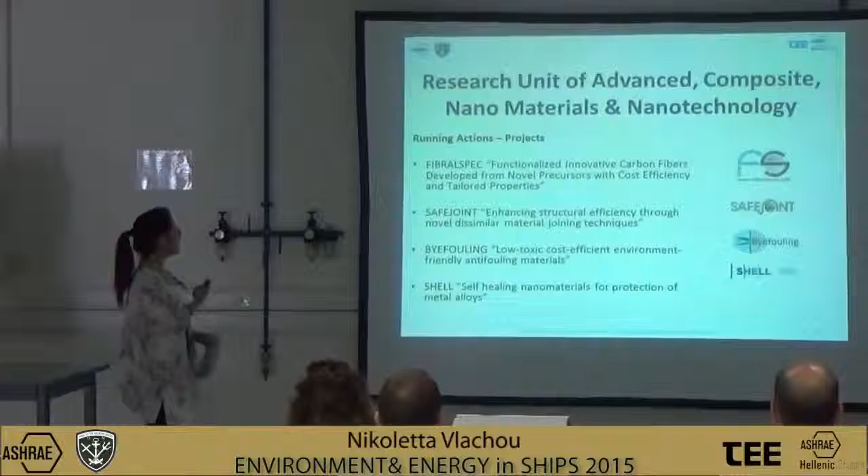These are some of our achievements. We have over 70 papers in international journals since 2006, and we have participated in various projects, national and international.

Now, my presentation will have this structure. First of all, I will refer to the maritime industry and why it's so important. Then we move on to the coating systems for ship painting, and we'll discuss the environmental impact that they currently have. Then I'll try to introduce you to life cycle assessment methodology, and we will see a small case study, and we'll have the opportunity to discuss the results that came of this study and every other question that may occur.

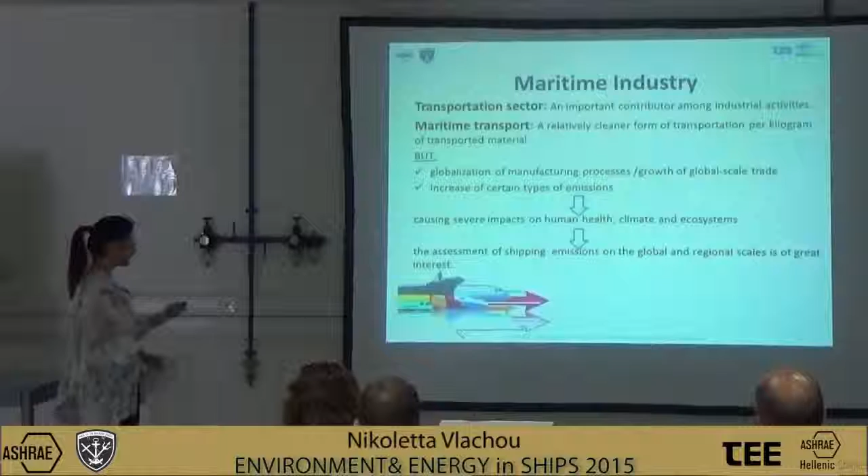First of all, as it is easily understood, the transportation sector is an important contributor among industrial activities, especially maritime transport, which versus air and road transport is a relatively cleaner form of transportation per kilogram of transported material. However, due to the globalization of manufacturing processes and the growth of global scale trade, there is an increase of certain types of emissions that may cause severe impacts on human health, climate, and also ecosystems. So, the assessment of shipping emissions on the global and regional scale is of great interest.

Those emissions that I mentioned can be classified into three categories. Those that are related to fuel consumption, and they are released during the operation of the ship. Secondly, the anti-fouling coatings, that many times have water-soluble compounds that are also released to the seawater. And last but not least, due to the maintenance and the waste that is produced during the maintenance of a ship.

An integral part of all the organic solvents and diluents are the volatile organic compounds, or else VOCs, that are used in the paint formulations or during the application of the paints in shipbuilding, and the reduction and the elimination of those and other toxic or carcinogenic components from traditional paint products has been attempted for many years.

A very good example of this, of a toxic component, is tributyltin, or else TBT. That was the favorite biocide for use in anti-fouling paints until the late 80s, when a Europe-wide ban on TBT use on boats under 25 meters came in. This was due to the observation that TBT was causing severe damage to shellfish communities, and not only.

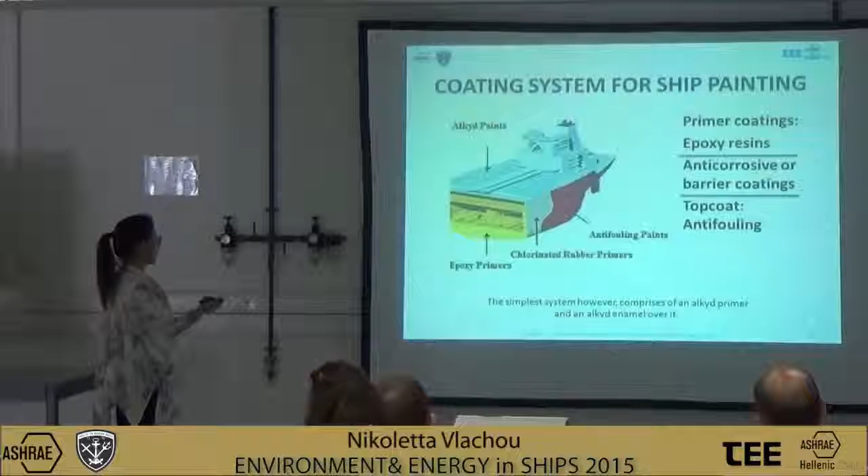And the last layer, the top coat, the anti-fouling one, has a dual function. First of all, the anti-fouling protection, as it is easily understood. And the second one, the decrease of drag resistance. For the external surfaces, the simplest system, however, comprises an alkyd primer for the external surface of the ship and an alkyd enamel over it.

I want also to say that LCA is a standardized method by ISO 14040, and there are two important applications of LCA. The first is the analysis of the contribution of the life cycle stages to the overall environmental load. And the second one may be the comparison between products for internal or external communications.

The concept of LCA started in the 1960s. Then the oil crisis came, and there was a need for development of LCA thinking. The interest increased in Europe till the 90s, until today, where there is a wide international spread. Now, for conducting a life cycle assessment, there are a lot of impact assessment methods. Examples of them are the ReCiPe method, the Eco Indicator 99, and the CML-IA.

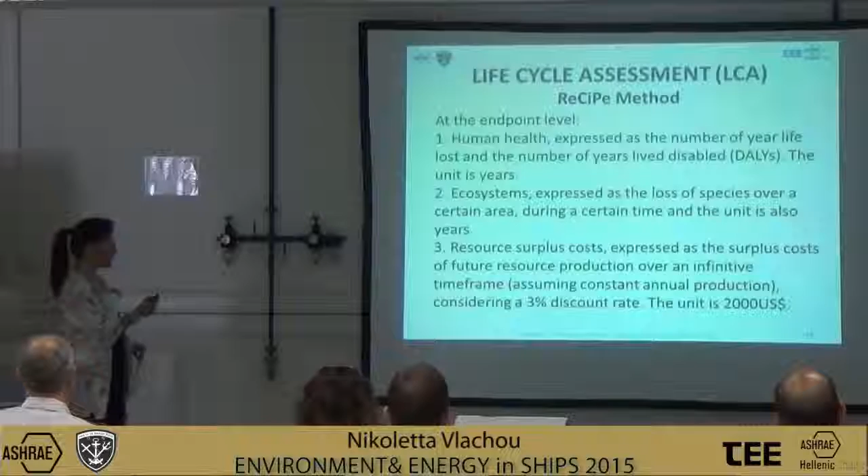It has 18 midpoint impact categories. 10 of them are related to the marine environment, and we have 3 impact categories that we're going to see right now. The first impact category at the endpoint level is human health, expressed as the number of years of life lost and the number of years lived disabled. The unit is years. The second one is ecosystems, expressed as the loss of species over a certain area during a certain time, and the unit is also years.

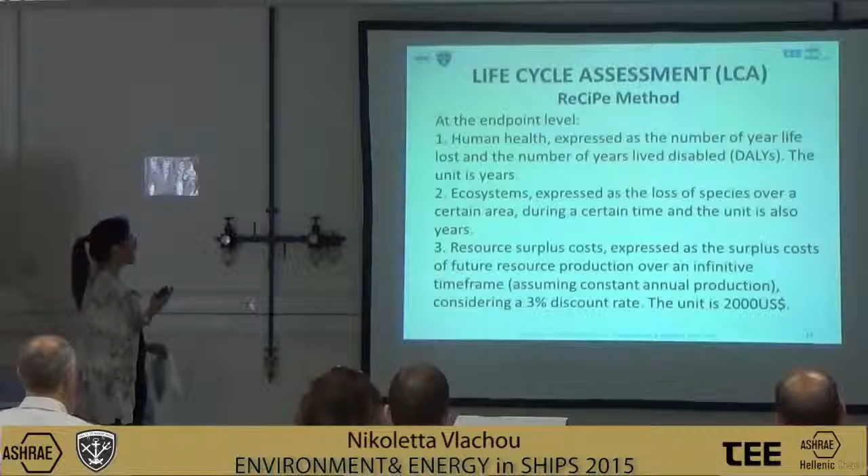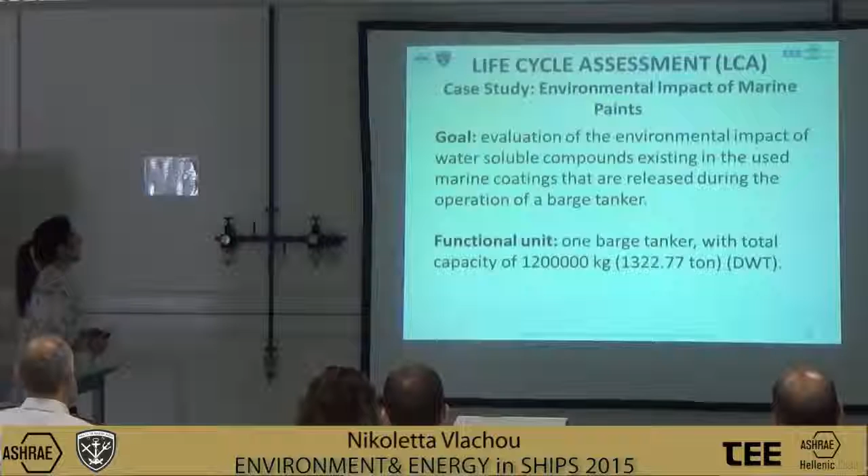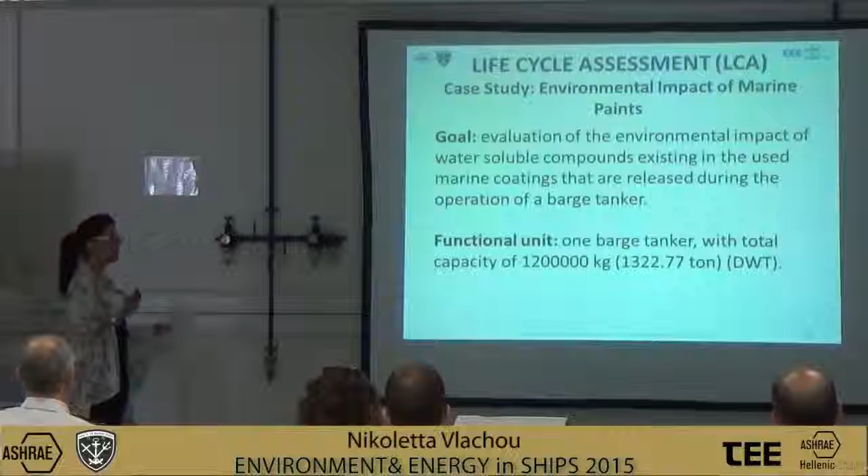Our case study referred to the environmental impact of marine paints, and especially the anti-fouling coatings. The goal was to evaluate the environmental impact of the water-soluble compounds that are released during the operation of a barge tanker. But why a barge tanker? We used this type of ship because it was already available in the database of the commercial software that we used, so it was much easier to begin with.

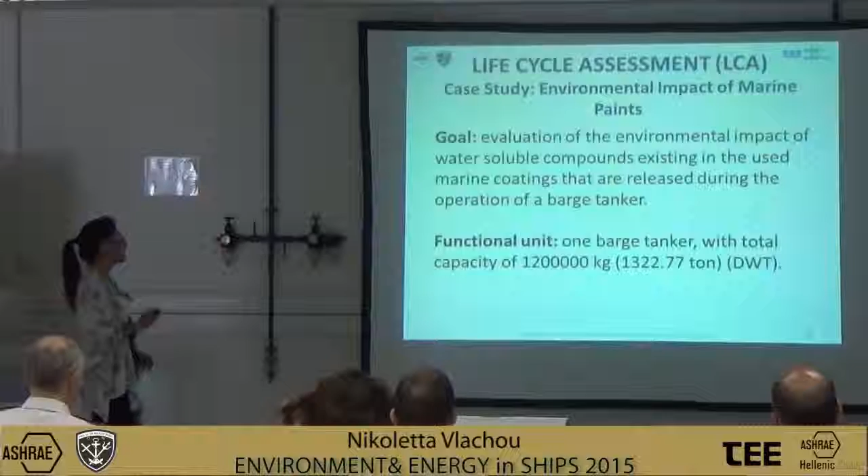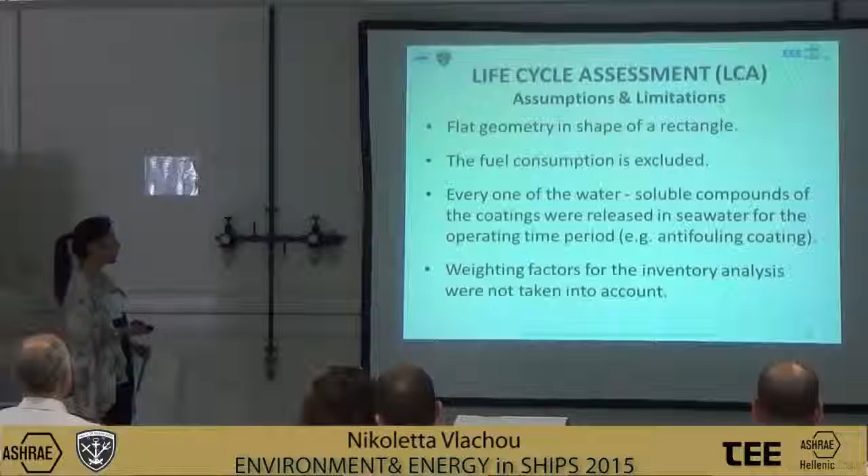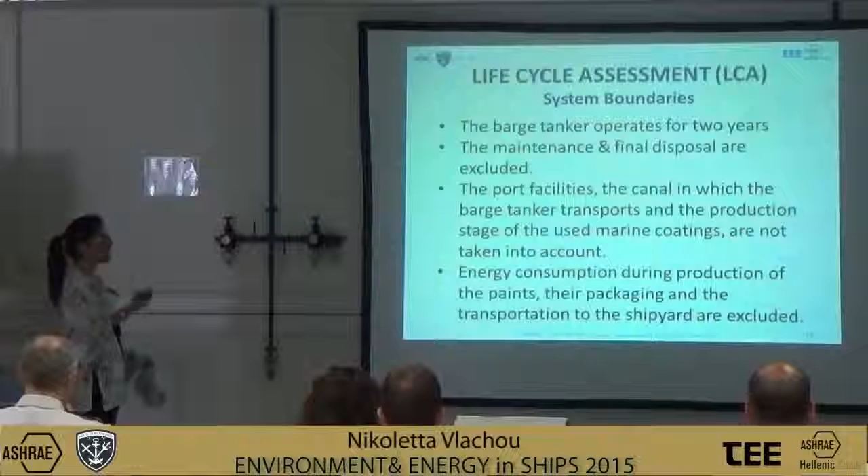The fuel consumption was excluded during our study. All of the water-soluble compounds of the coatings were released in seawater for the operating time period, and the weighting factors for the inventory analysis were not taken into account. We assume that the barge tanker operates for 2 years. That's why the maintenance and final disposal are excluded, and it was difficult to calculate the fuel consumption for such a short period.

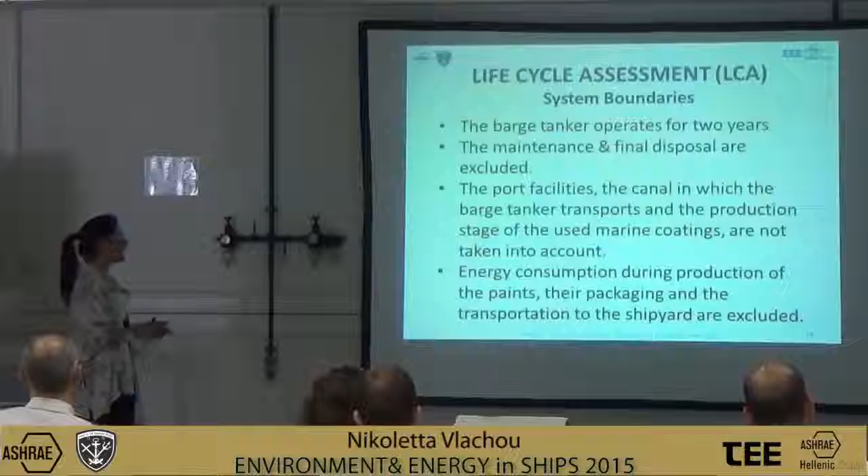The port facilities, the canal in which the barge tanker transports, and the production stage of the used marine coatings are not taken into account. And energy consumption during production of the paints, their packaging, and their transportation to the shipyard are also excluded. We only wanted to see the environmental impact of the anti-fouling and the effect that the released compounds may have on the marine organisms.

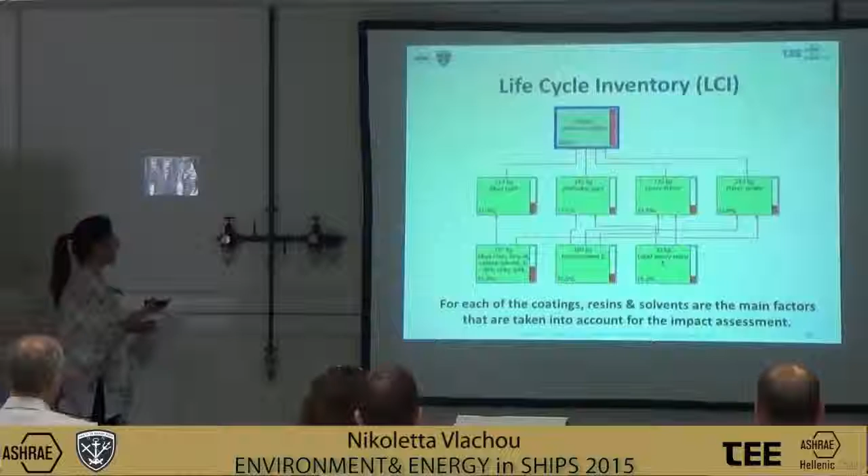Okay, by entering now our data to the commercial software that we use, this tree diagram was automatically made, which depicts the interaction between the different materials used and their contribution to our final product. As it can be seen, for each of the coatings, resins and solvents are the main factors that are taken into account for the impact assessment, as the other compounds are added in very small quantities. So practically, we assume that they do not have such effects.

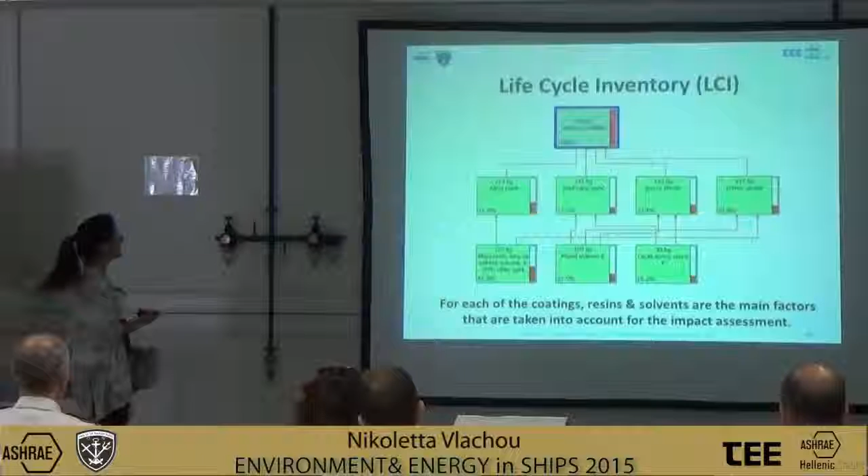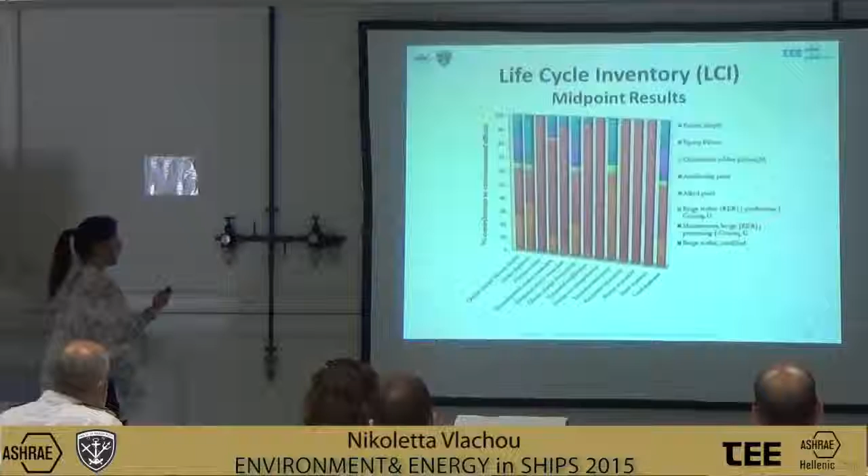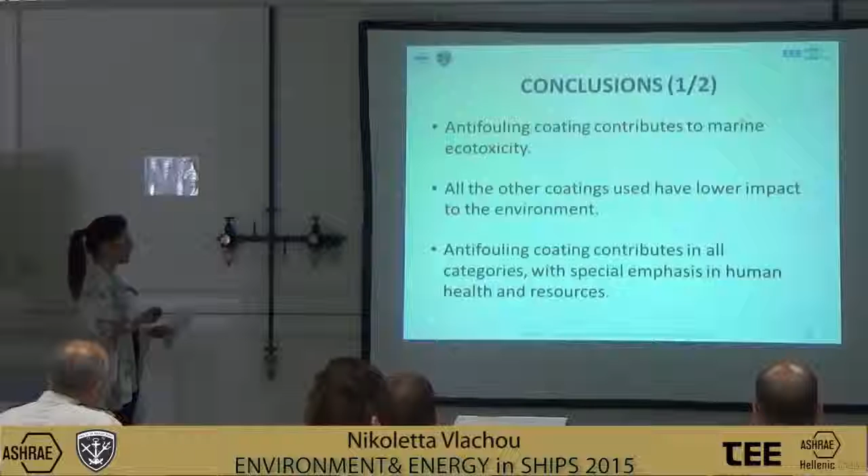The anti-fouling coating contributes to marine ecotoxicity. All the other coatings have lower impact, as I already mentioned. And anti-fouling contributes not only to the marine environment, but also has a negative effect on human health and on resources too. The alkyd coatings also exhibit higher impact on ecosystems due to the resins used in their production, and the impact of the other two primers, the epoxy and chlorinated rubber, is lower as they do not contact seawater directly.

Some future recommendations are the need for replacing the toxic compounds that are included in marine paints, and also the need for development of innovative coating systems with anti-fouling activity but with fewer bioaccumulative effects in higher organisms. These innovative coating systems may possibly alter the fuel consumption also.

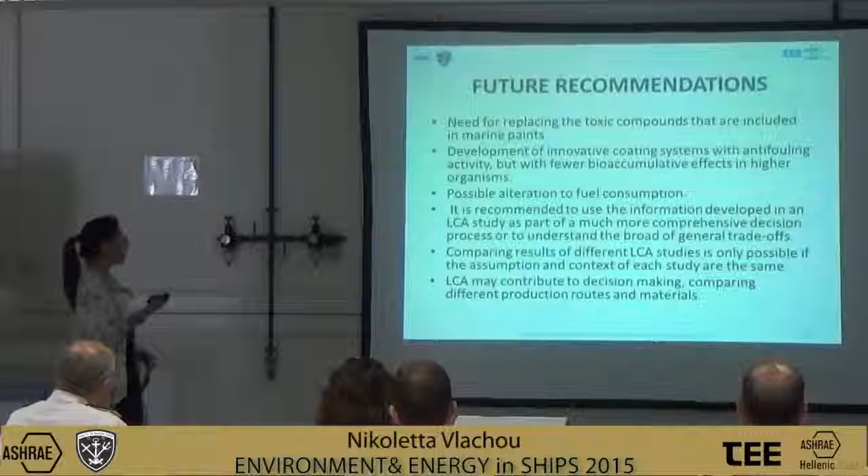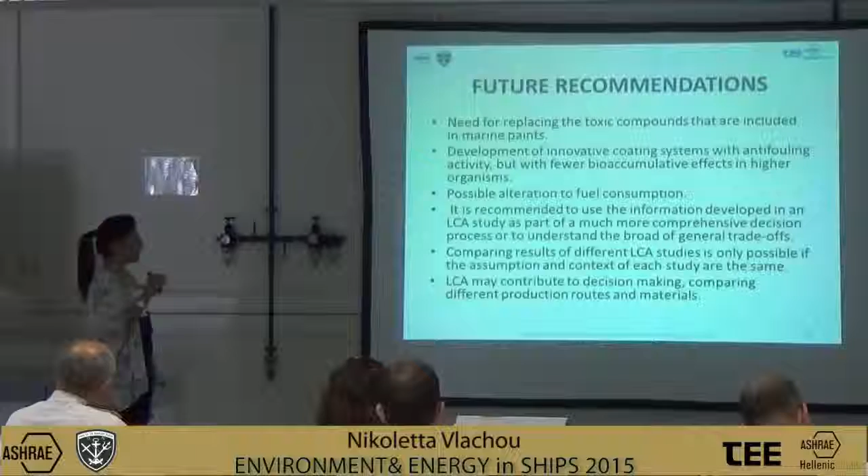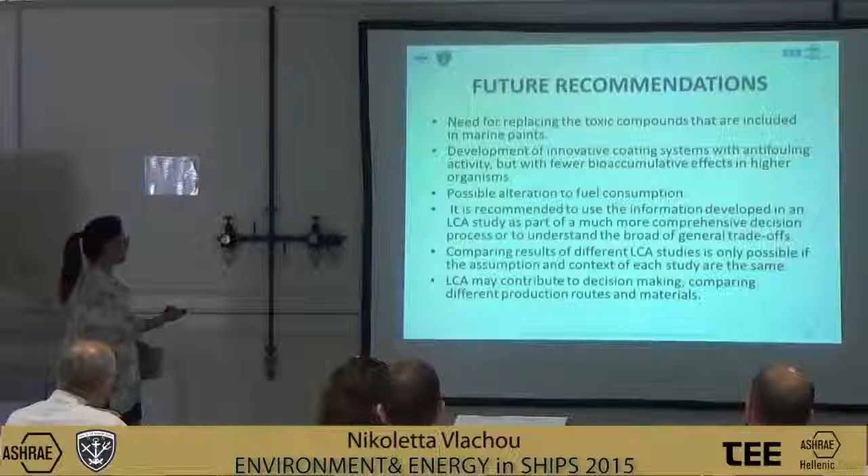And as far as LCA is concerned, it is recommended to use the information developed in an LCA study as part of a much more comprehensive decision process, or to understand the broad or general trade-offs. Also, we can compare different LCA studies only if the assumptions and the context of each study are the same. And LCA may contribute to decision making, comparing different production routes and materials. And as we try to prove, it may also contribute to the maritime industry.